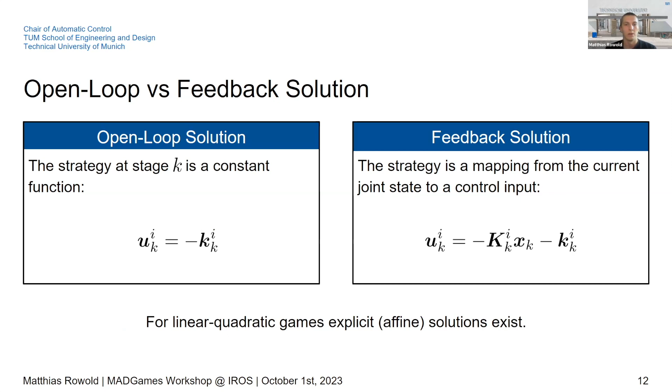Given all this, our goal for the upcoming research is to find out whether the Nash equilibrium is an appropriate choice for non-cooperative racing scenarios. And if yes, is it better to follow the behavior obtained from the open loop or from the feedback solutions? Furthermore, we want to find out how robust these two concepts are against uncertain cost functions and players that do not behave according to the Nash equilibrium.

To answer these questions, we need to find a framework that is able to generate the open loop and the feedback trajectories. For solving dynamic games for trajectory planning, there are already many approaches, and we categorize them into 5 groups: generation of offline policies; sampling of many trajectory candidates and then solving for an equilibrium, for example with bimatrix games; iterative best response algorithms that have already been applied for racing; and more recent categories like iterative LQR and methods that find trajectories fulfilling first order optimality conditions for the Nash equilibrium.

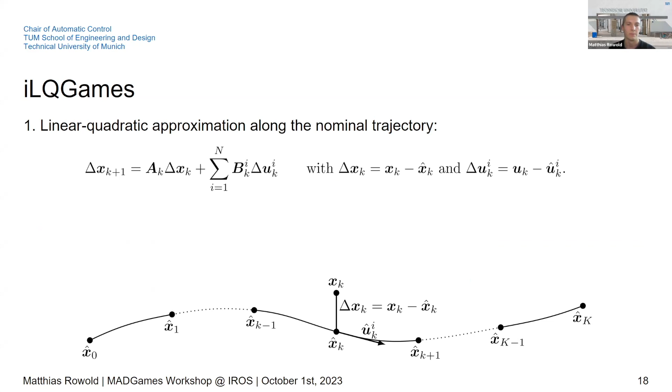Beginning with an initial trajectory guess, the first step is to approximate or linearize the dynamics. From there on, we always consider the deviation from this trajectory. While the dynamics are linearized, the cost function is approximated with the second order Taylor series, and so we obtain a linear quadratic game that approximates the original game locally.

In a backward pass, this linear quadratic game can be solved with a recursion very similar to time discrete LQR that we know from optimal control problems, and so we get a time-variant, affine feedback law for every player.

Here's the main advantage of ILQ games that we see: by just changing this recursion, we can obtain the open loop solution as well. Then, of course, this big matrix K that's multiplied with the vector of the current state X becomes zero, so that the new control input does not depend on the state anymore. There's no need to change anything else. We only have to change the recursion; we do not touch the cost function or any other properties of this algorithm.

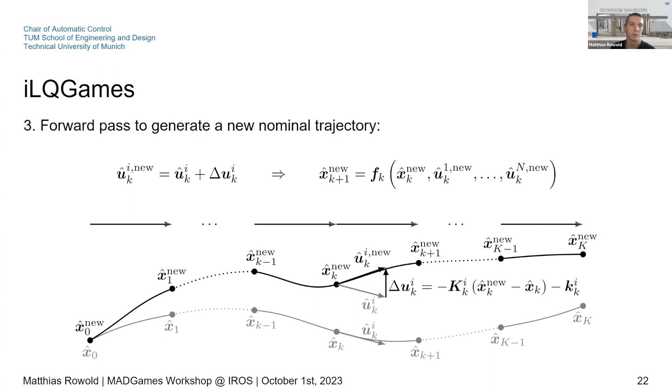Then finally, in the forward pass, knowing all the strategies of the players, we can update the trajectory. The forward pass applies this delta U additively to the previous control input sequence and simulates the nonlinear dynamics forward, generating the new trajectory. This entire procedure is repeated until there are no changes in the control input sequences anymore.

We have already conducted a few simulations, and they show that we can indeed generate interaction-aware behaviors that consider the collision avoidance of the vehicles and of the opponent players. However, we also saw that the solution to which this algorithm converges heavily depends on the initialization of the algorithm and on the step size we use during the forward pass.

This brings us directly to the next steps. We want to analyze these convergence properties further, but the main focus is still on the difference between the open loop and feedback solutions of the racing game. Another observation we made is that the cost parameterization can be used to adjust the aggressiveness of the ego vehicle, which can be helpful when we want to distribute the responsibility for collision avoidance in different racing scenarios. Further things we want to analyze are the performance of the obtained behaviors when we apply this algorithm with a receding horizon, how this algorithm behaves when we have players that do not behave according to the Nash equilibrium, and of course we want to take into account more complex racetrack geometries and not only this straight racetrack.

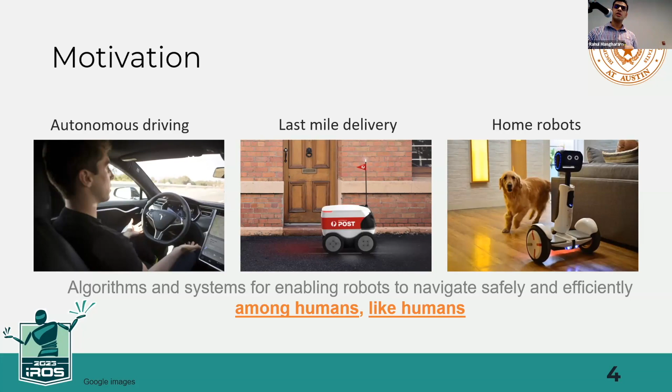And even though we've seen some tremendous progress in these areas over the years, we've still not gotten to the point where we can confidently and safely integrate these robots into the fabric of human lives. As humans, we can do all of these applications because humans move in very diverse, unique, and complex ways, but robots cannot do this. What do I mean by that? I mean that even though robots can navigate autonomously fairly decently and reasonably well, they cannot do tasks like...

They cannot go and pick up our groceries and order and go and shop for groceries. They cannot run through a crowded airport if they wanted to go and attend IROS and they're late for the flight. They cannot run through a crowded airport. And finally, they cannot drive in general traffic. Like you have Cruise, you have Waymo, they can do all these kinds of driving, but you need to geofence them, you need to do all kinds of mapping, you need to train them on millions of miles, you need to create simulations on all of that stuff.

But they cannot drive in general traffic, especially like in New York or India. So there are a bunch of challenges that plague these robots when it comes to deploying them in shared human environments, like problems of safety, uncertainty, robustness issues, and adversarial issues.

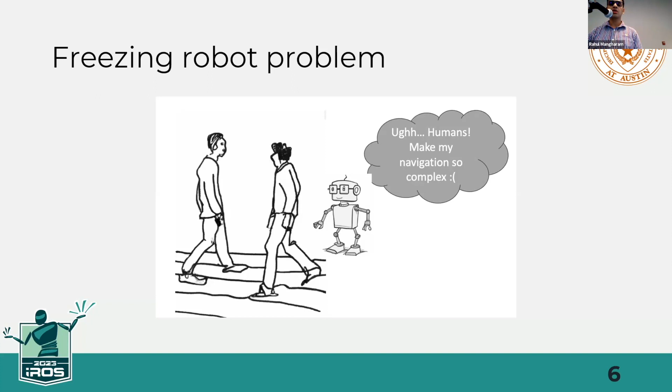One of the issues I focus on in this paper is the freezing robot problem, which is when faced with a dense and dynamic scenario, due to a lack of feasible actions, the robot may just freeze and enter a deadlock. So how do we resolve this is part of the research question: how we can design a navigation algorithm for multi-agent scenarios that is provably safe, provably deadlock-free, and fully decentralized.

I'll put out a disclaimer that this work is a little tangential to the theme of the workshop, in that I'm not solving a dynamic game. I'm modeling it as a partially observable stochastic game, but I don't solve it using techniques like iterative best response or direct formulation, which were presented in an earlier talk. I do model it as a partially observable stochastic game, though.

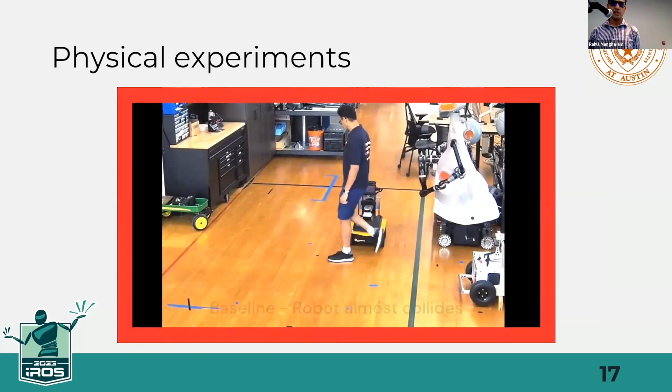Finally, I'll show, may not have enough time to show all the results, but hopefully I'll show a couple of the scenarios. The first one is the baseline: human passing through the intersection, expecting the robot to yield, but in the baseline the robot almost collides. Here is our game-theoretic deadlock resolution approach—it anticipates the human and yields to it.

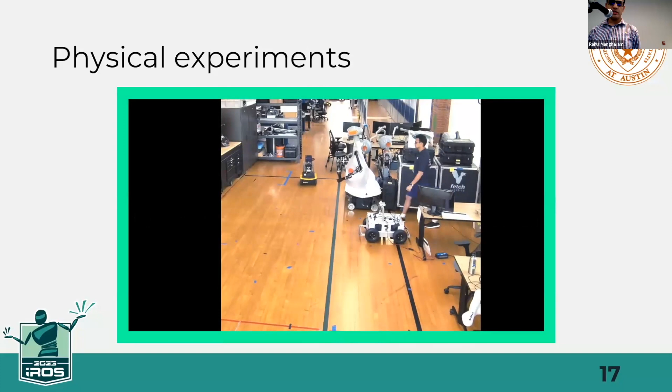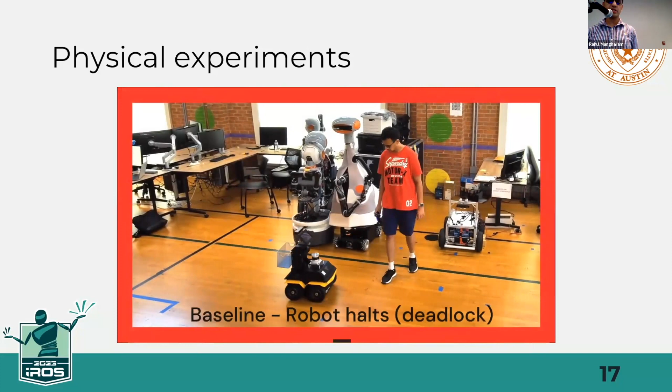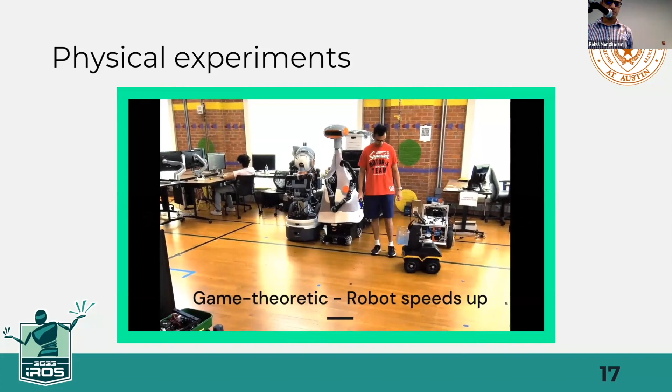Here the human deliberately tries to be cautious. The expectation is that the robot should speed up once it sees the human slow down a little bit. But as you can see, it enters a deadlock and waits for the human to back up and wait for it to pass. And here we can see the robot speeding up.

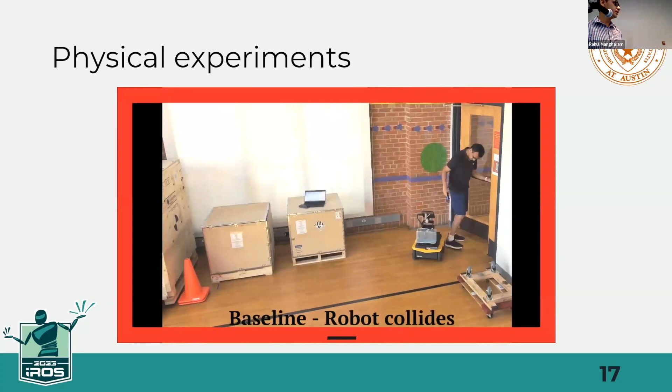Finally, we have a doorway scenario where again the expected behavior is for the robot to yield, but it again collides, and in the game theoretic solution, the robot will yield.

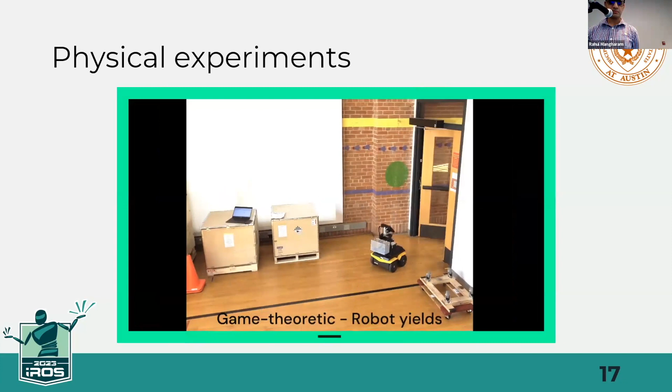Yes, we run into scaling issues. So we've done it with 2 agents and 3 agents, and we started to run into problems with more agents. But the idea is that we're explicitly focusing on tightly coupled interactions—that's the target area. And when you think about dense crowded areas, you typically are engaged in tightly coupled interactions with few agents at a time, right? Even though the scene itself might be dense, at any one point in time, if you're engaging in a doorway scenario or hallway intersection, the interactions would be on a micro scale, where you'd be interacting with one agent or two agents at a time. So that was our entire philosophy, but we do recognize that there is a scaling issue with our approach here. Thank you.